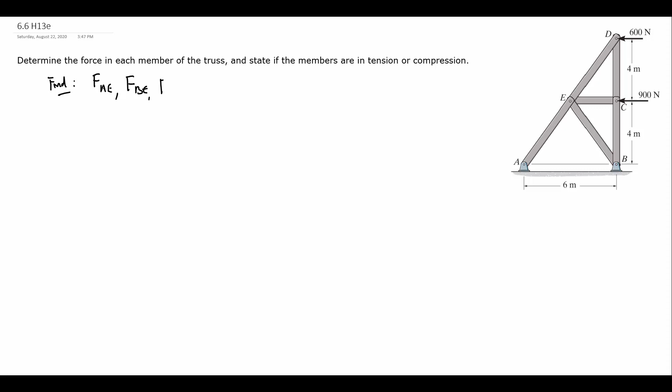This problem asks us to find the forces in each of the members that make up this truss. So if we look here, we're going to need to know the force in what I will call AE, BE, BC, CD, CE, and DE. So counting them up, we have 1, 2, 3, 4, 5, 6. So 6 forces, 6 members in which we need to find the forces.

Since we want to find the forces in all the members of the truss, I'm going to use method of joints to solve this, as it's going to be the most systematic way to find those forces. If only specific members' forces were required, I would consider using method of sections here. So no matter what method I was using, I would first look to see, is this structure statically determinate or indeterminate, before I draw my first free body diagram or write my first equation.

And looking here, A is a pin and B is a pin, which means that I'm going to have 4 support reactions, AX, AY, BX, BY. So this structure is statically indeterminate, meaning that the external free body diagram will not let me find all of those support reactions. There's 4 unknowns, but I would only be able to get 3 equations out of it. So I am going to opt to not draw the external free body diagram in this case. I am going to start already with pin diagrams. There's nothing wrong with drawing the external free body diagram, but I know that there's going to be unknowns I just can't solve for. So now I want to look at what pin do I want to start with.

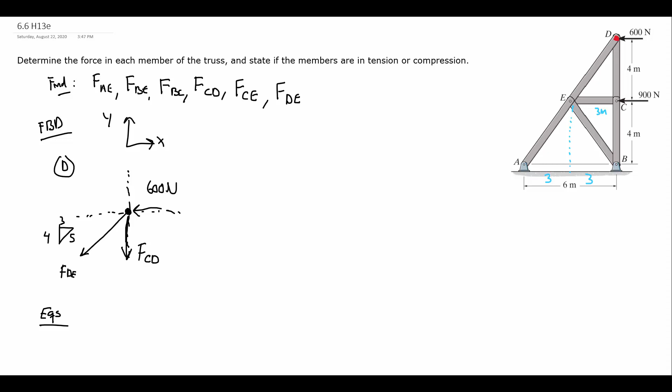So actually, I'm going to start writing some equations before I draw another free body diagram because I know this will be solvable. So I can sum forces in the x, forces in the y. The order does not matter, but in this case, I'm going to start in the x direction. And this is coming from free body diagram D, so I'll put a superscript D here so I know which free body diagram I'm summing forces in the x. And because the whole truss is in equilibrium, every section of it is as well, so I know it's going to sum to 0. Now I chose to start in the x direction because with my unknowns, only FDE is going to have an x component. So it's going to have 3/5 FDE, and that points to the left, which is negative, minus 600 newtons.

And I can see that that's going to be solvable. So I'll wait a minute to solve it though, because I can write my second equation then. In the y direction in this picture, I will have all of FCD pointing down minus 4/5 of FDE.

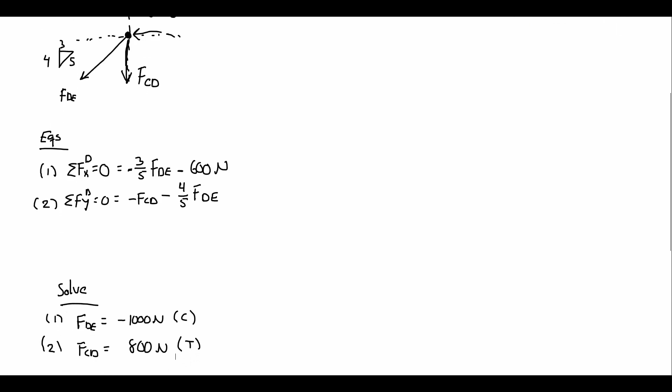be in tension. All right, so here I'll note one, FDE came out negative, but I am never redrawing a free body diagram once it is drawn. I assumed tension, I drew it that way, my equations were written that way. Just because my assumption was wrong, that's okay. I know it's in compression now, but I need to be consistent in how I use it. Once I assume it was in tension in one place, that has to follow everywhere else.

So I was able to solve for two of my own unknowns, DE and CD. So let's just check those off. DE is solved for here, and CD as well. So just keep track of things we know, things that we don't know yet. All right, so if we look at our find, there are still 4 forces that we need to find. We've only used one free body diagram, so we can keep going.

So what's our next target? We still have A, B, C, and E that we can make pin diagrams for. Again, A and B I probably want to save because they have those supports that we did not solve for yet. So C and E are the next reasonable choices. C is attached to 3 members. However, one of them we already know. We already know CD. E is attached to 4 members, only one of which we know.

So I'm going to say that C is the next one we want to draw because there's only going to be 2 remaining unknowns in this picture. So it's going to be algebraically easy as our next step. Right, so point C is at the center of this free body diagram. I'm going to copy exactly that force of 900 newtons acting on it. And now the 3 members it's attached to.

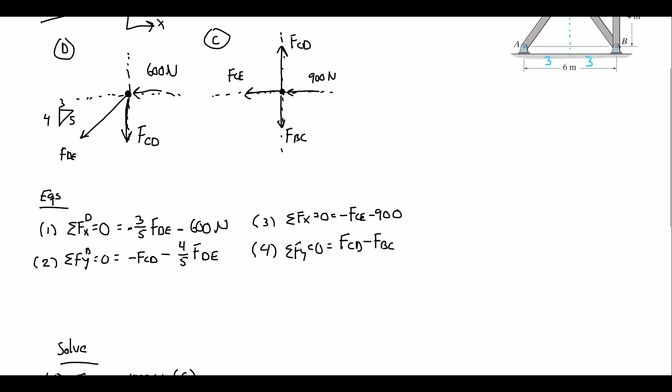In the y direction, from the picture, FCD is up, so it's positive. FBC is down, so it's negative. Again here, it's algebraic. From the picture, FCD points up, so it's positive in this equation. In the solve step now, I can start substituting in values. So solving equation 3, FCE is the only thing I don't know. FCE is going to be negative 900 newtons, so it too is in compression.

In equation 4, I already know the value of CD is 800, so I can solve for FBC. So it did turn out FCD was positive, it was in tension, but I don't need to know that until I put it into this solve step.

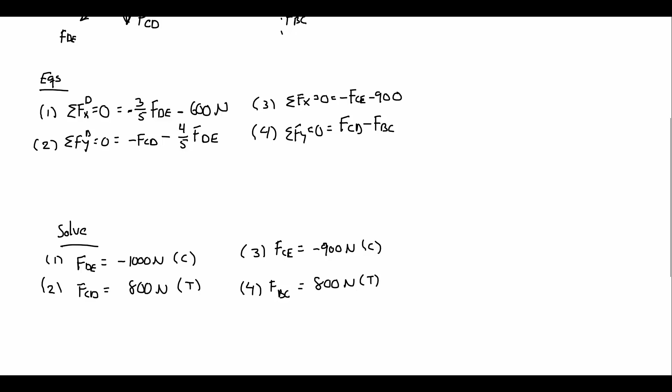So FBC is also 800 newtons, also in tension. So CE and BC we now have. BC and CE. So only two unknowns are remaining. We have A, B, and E that we can still make free body diagrams from.

So E is going to be the next natural choice here because it's attached to 4 members, but now when we draw it and write its equations, 2 of the 4 we already know. So it will only have 2 unknowns left to solve for. So it's going to make the algebra easier to get through, certainly.

All right, point E: there's no external forces acting on it, only the forces in the members. So it has member CE, which we're assuming tension because we assumed it in the other picture as well. We are going to have here the force in DE, and this way the force in AE. Both of these make 3, 4, 5 triangles. So I'll just indicate that here. 3, 4, and 5 is that angle.

And finally, we have BE. And that too is going to make a 3, 4, 5 triangle. I'll just make sure it's marked here and clear. So now in picture E, those are the 4 members that are affecting it, assuming tension in all of them and no external forces. So we can move on and write its 2 equations.

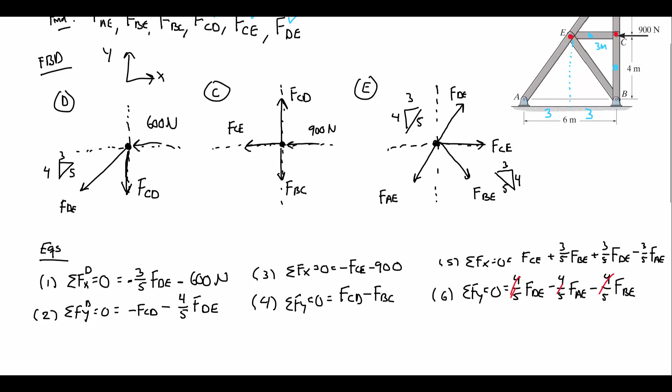Now here, unfortunately, AE is in both and BE is in both of these equations. So there's not a super simple way to solve this. We will have to use substitution or elimination and solve equations 5 and 6 simultaneously. It's not too hard. It's only 2 equations, 2 unknowns. It's not as easy as 1, 2, 3, 4 were to solve, but there are only 2 remaining unknowns.

So if we solve 5 and 6 simultaneously, we will get that FAE is a negative 1750 newtons. So it is in compression. And the last unknown, BE, we will get positive 750 newtons, tension. All right, so down here, these are the 6 unknowns that we needed to solve for. And we did it with 3 free body diagrams.

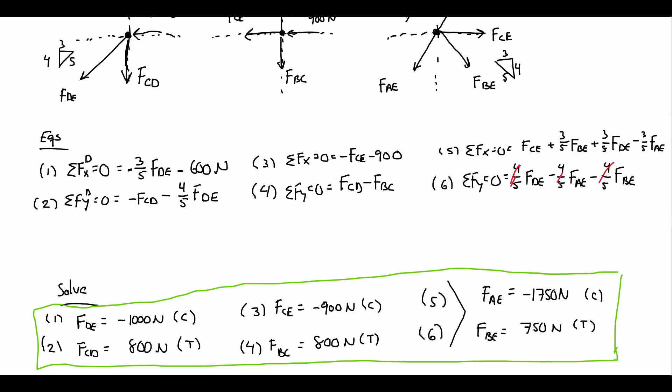We were able to do it without having to solve for those reactions at A and B. We were not asked to find them. So we were able to skip the external free body diagram and start with our pin picture. Because it was statically indeterminate, I decided to start at D and work my way down so that we could have, at least by hand, the easiest system to solve as we went along.

And from 3 free body diagrams, each of them being a particle equilibrium free body diagram, we were able to get 2 equations each, 6 equations for the 6 unknowns we were interested in, and we were able to solve the entire thing. And one thing I should have checked at the beginning was, do we have any zero force members? Well, at this point we already know that we don't, but let's see if we go through the steps of identifying if we could.

All right, so from pin A and B, we're not going to look at any of the members because A and B are supports. C and D have external forces acting on them, so we're not going to consider them for the zero force members. So really pin E is the only pin that we could look at and see, is there a zero force member attached to it? AE and ED are parallel to each other, so neither of them is definitively a zero force member. We cannot conclusively say either of them would be.

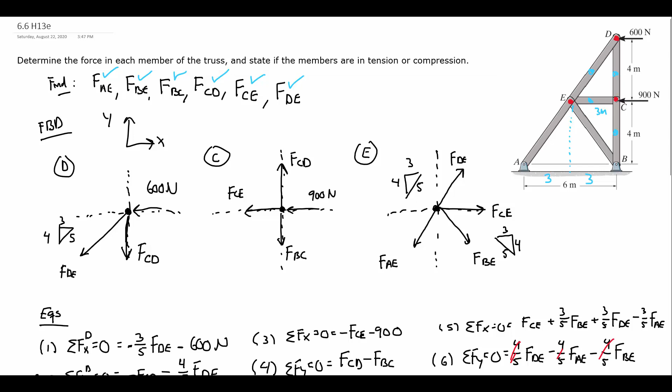If we look at EC and EB, they both go in a direction that is oblique to the AED axis. So EC and EB both share that direction, so if we were at the start of the problem, we could not definitively say that EC or EB, that's BE or CE, were zero force members either. So we do already know none of them were, but there was nothing we could identify up front anyway. But it is a good idea to start by seeing, can we see any zero force members before we start the problem?